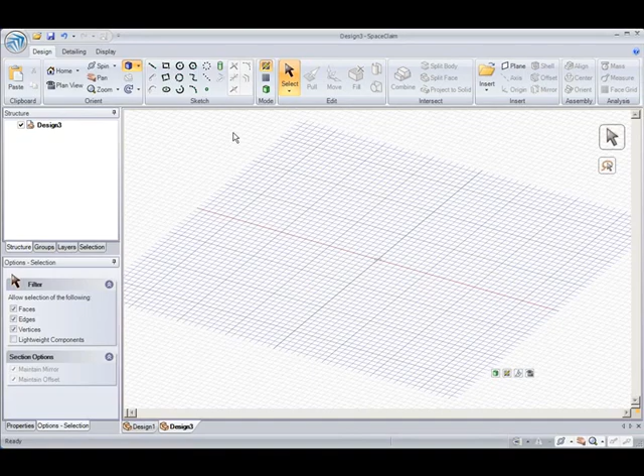First, we'll sketch a rectangle on our sketch grid. I'll start by selecting the rectangle icon. Click once to start the corner of the rectangle, and then you can enter in values. First, type in the width of 4 inches, but don't hit enter yet. Press Tab to switch to the other entry field and enter in the height of 1/2 inch.

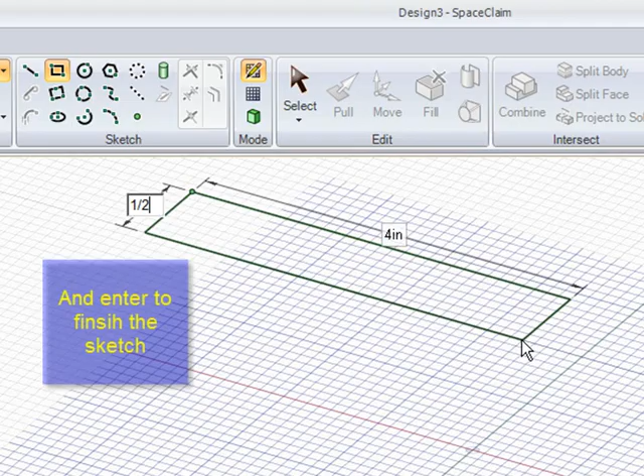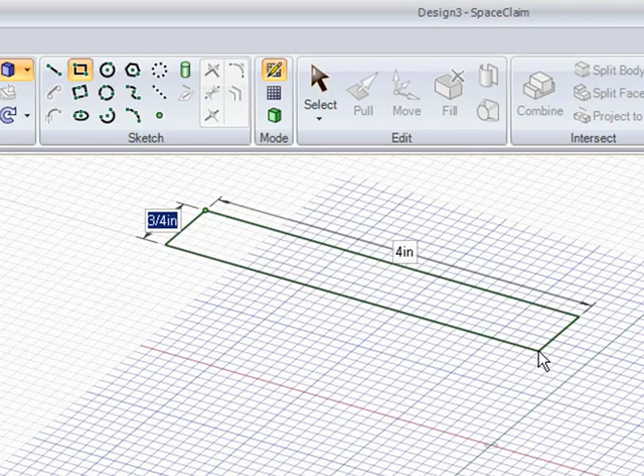If you didn't get the sketch right the first time, just undo using the button in the top left-hand corner of the screen, that's our quick access toolbar. Let's try that again one more time. I'll start by clicking once to start the rectangle, type in the first value of 4 inches, tab to enter the second value of 1/2 inch, and now hit enter to accept both entries.

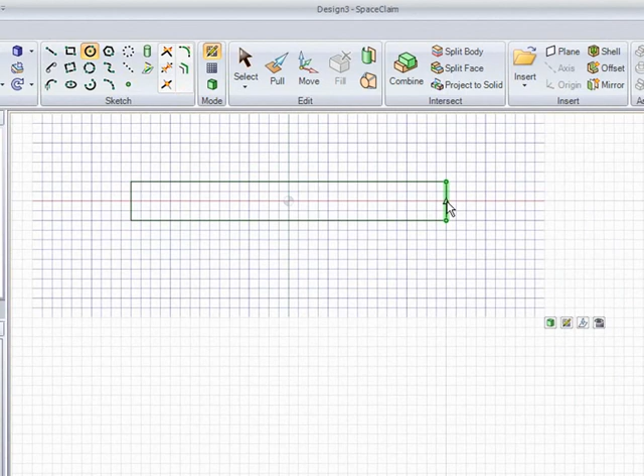Now we will draw some circles, but before we do, let's orient the sketch grid to be heads up by hitting Plan View. This icon is also located in the Sketching mini toolbar on the bottom right-hand side of the screen. To place the first circle, hover over the end line of the rectangle, and while it is highlighted in green, press Shift once to create a dimension off of that line.

This is what we call Shift Touch. Place the center of the circle 1 inch beyond the rectangle, and just go ahead and set its diameter to the same height of that rectangle. We'll do the same thing on the left, but this one will be located farther out. Let's make it 1.5 inches out.

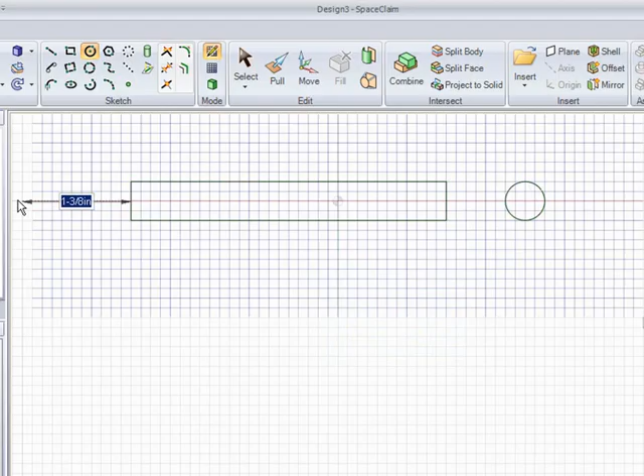Once your sketch is done, enter the Pull tool, and watch how those shapes turn into bounded regions that we can now pull into solids. I'm going to press the trimetric button so we can see everything a little bit better.

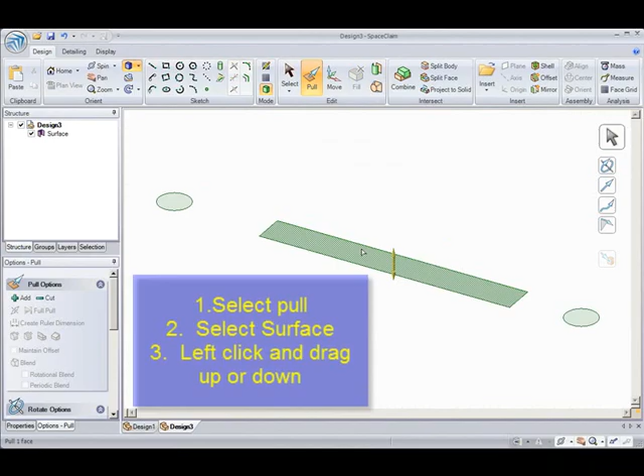First, pull the rectangle up 1/4 inch to make it into a box. Now we'll pull the circle on the right up. Start by selecting the surface and watch as you drag it up to any height you want. But let's say that's not really how high we wanted it, and we wanted to pull it up to the top of our other box.

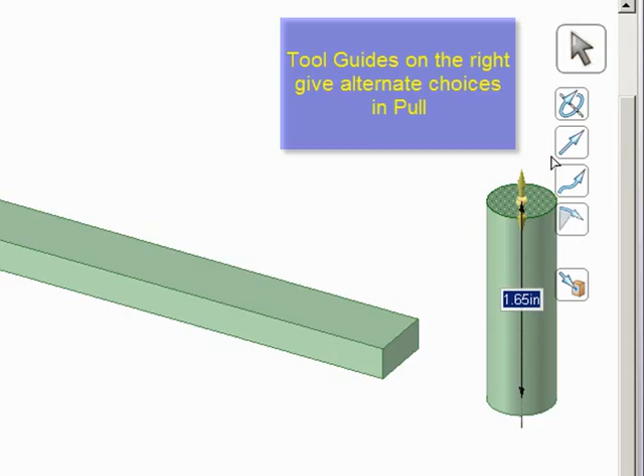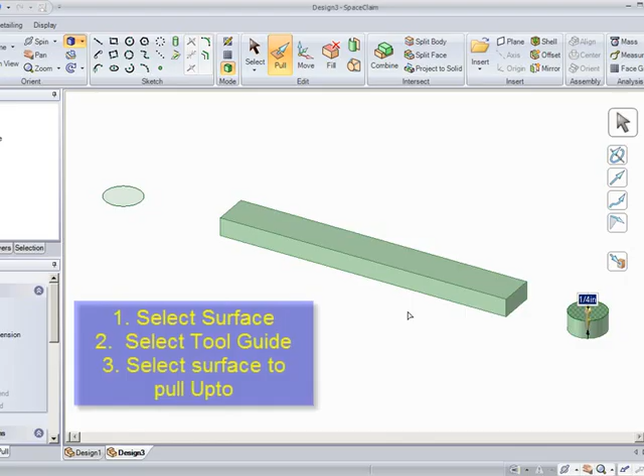For this we can use one of our tool guides on the right side of our screen. These tool guides give you expanded operations within Pull, like revolve, sweep, and draft, which you will learn in later tutorials. The first guide we're going to use today is the Up To Body tool guide. So let's select the Up To tool guide and then choose the top of the box. Notice that the cylinder just jumps right up to the surface you selected. Now we'll do the same thing on the other side by selecting the surface, selecting the Up To tool guide, and then selecting the top of the box.

Now using the same Pull tool, we can change the diameter of the cylinder by selecting on the cylindrical surface and pulling it out to a new radius. Let's go ahead and set that up to 3/4 of an inch.

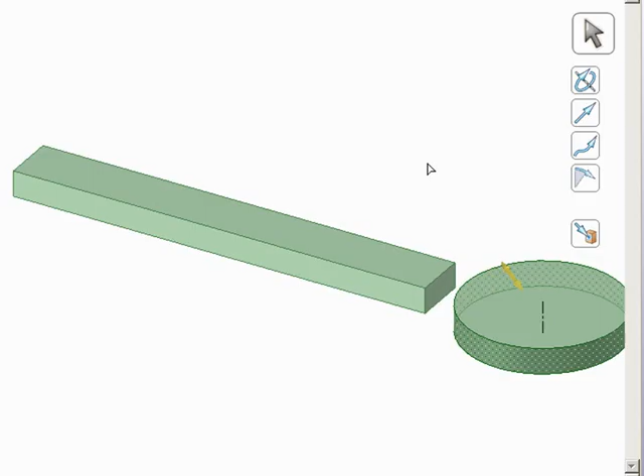Before pulling another surface, make sure that nothing is left selected or highlighted. You can do that by selecting out in white space to clear your selection. Now I'll pull on the wall of the box to make it smaller. Or I can pull the wall of the box all the way into the cylinder to merge those two solids into one.

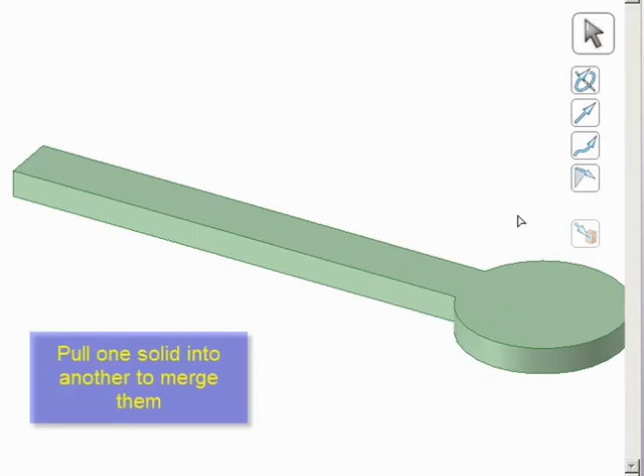Now I want to move the opposite side of the box, so we will need to rotate the model in order to select it. You rotate the model by holding down the middle mouse button while you move the mouse on the screen. Or you could also select the spin icon in the toolbar to do the same thing.

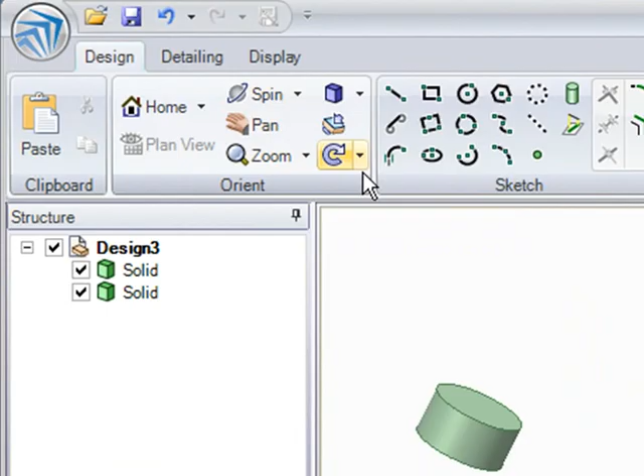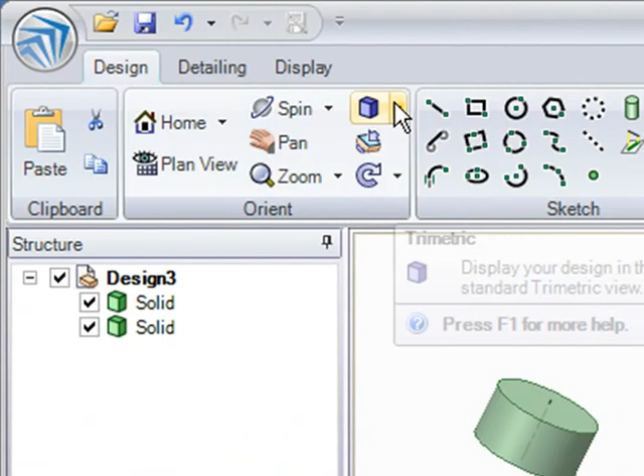While we are learning about navigation, I also want to show you how to pan and zoom. To zoom, press Ctrl and the middle mouse button together while you move the cursor on the screen. And to pan, press Shift and the middle mouse button together and move the cursor on the screen. You could also choose from our preset view settings, which I usually use to get the model back to the view I'm familiar with, the trimetric view.

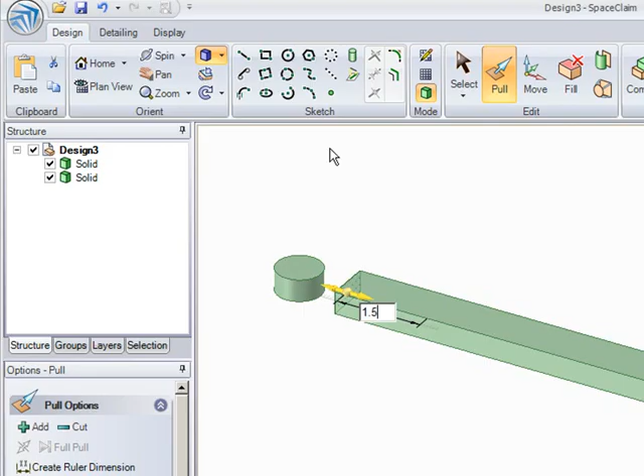Now let's go back to moving that wall. We are still in the Pull tool, but this time we are going to pull to an exact entered value. Select the wall of the box, but this time as you are pulling, hit the space bar. You'll see a highlighted value appear, and now you can enter in the exact distance you want to pull. Let's enter 1.5 inches, which is the exact value we offset the circle originally. And as you can see, those bodies merge together too, and there is only one solid left in the structure tree.

Now let's pull on the smaller cylinder, but this time watch as the walls around it adapt to the changing diameter. I want you to change the diameter of that cylinder to 3/8 of an inch by hitting the spacebar and typing in 0.375.

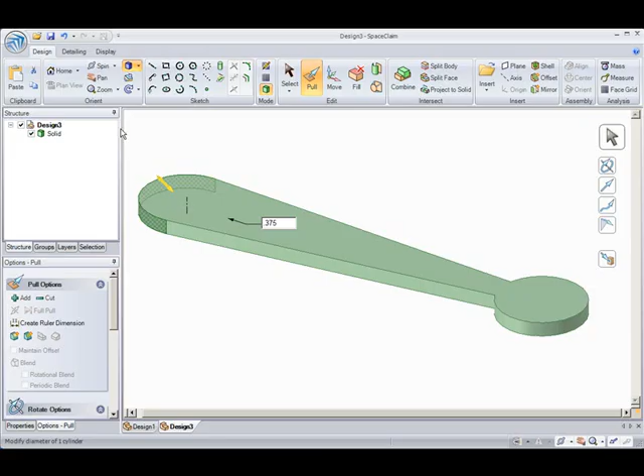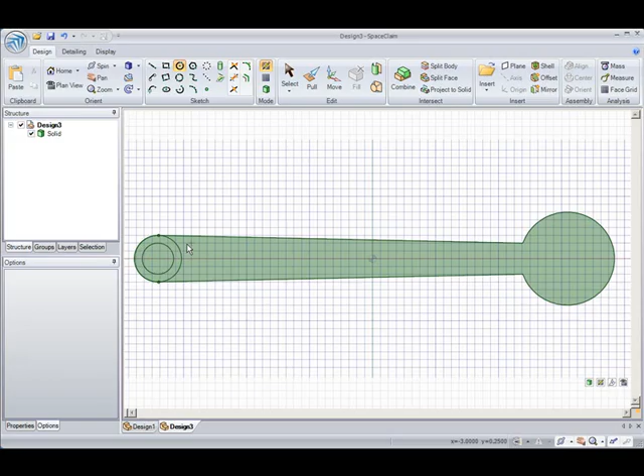Alright, let's sketch some more now. Select the circle icon in Sketch and select the top surface of the component to sketch on. Let's draw 2 concentric circles in here to create the handle. This outer one is going to be the same diameter that already exists. Now using Shift touch off the center of the circles, let's place another smaller circle farther up on the handle. Now we're going to create 2 tangent lines connecting the 2 smallest circles.

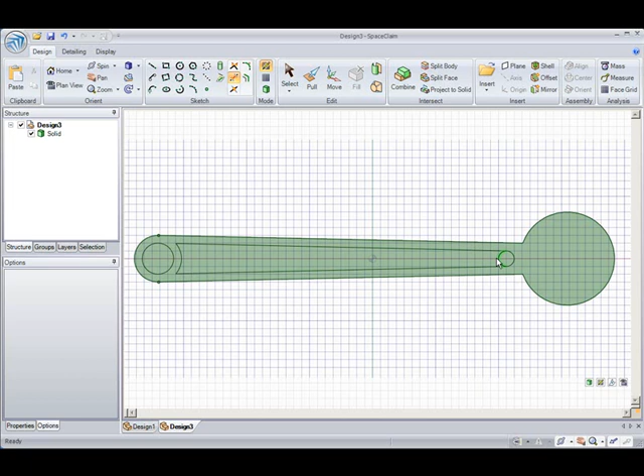My sketch is a bit cluttered, so I'm going to clean up the sketch by extending some of the edges to create corners. Select the Trim tool and select the 2 edges you want to trim together. And we'll see how the sketch trims and connects everything nicely to reflect exactly what I want. Now we'll use the Trim tool, and let's do the same on the other side by clicking on that circle.

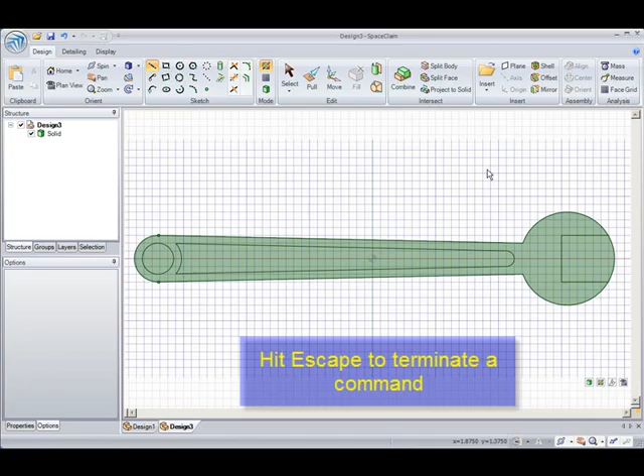Now we're going to draw a chain of lines to create the jaws of the wrench. Start the first line on the edge of the circle, then draw the vertical line down, and finish the sketch by snapping to the circle again. To end a chain of lines, hit Escape, or you could have double-clicked exactly where you wanted it to end.

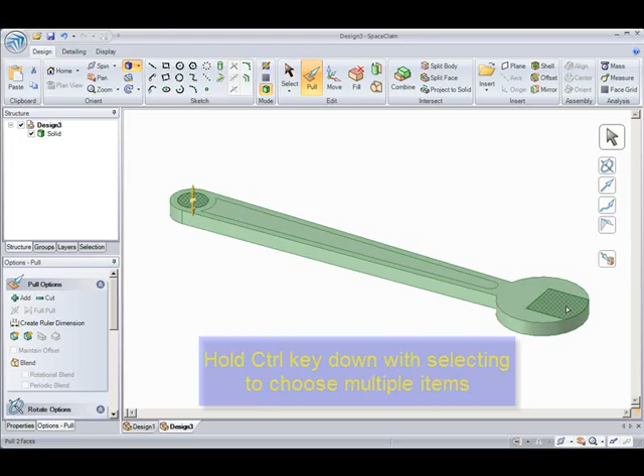Now when I enter Pull, I have 3 more regions to pull on. I'm going to show you how to select 2 regions to pull at the same time. It works just like it does in Windows. Select the circular region first, and hold the Control key down while you select the second region that defines the jaws of the wrench. Now that both of them are selected, you can just pull those together and get rid of the material.

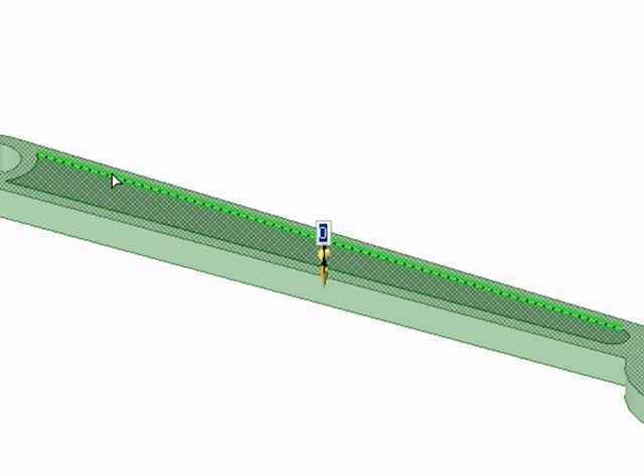Now select the center region. But when the mini toolbar pops up, choose the ruler icon. This allows me to set a dimension. You can see that I am prompted to attach the end of my ruler anywhere I want. Go ahead and attach the end of the ruler to the bottom edge of the component, and then enter in a value of 0.1 and watch what happens. The final thickness of that surface is now exactly what I entered.

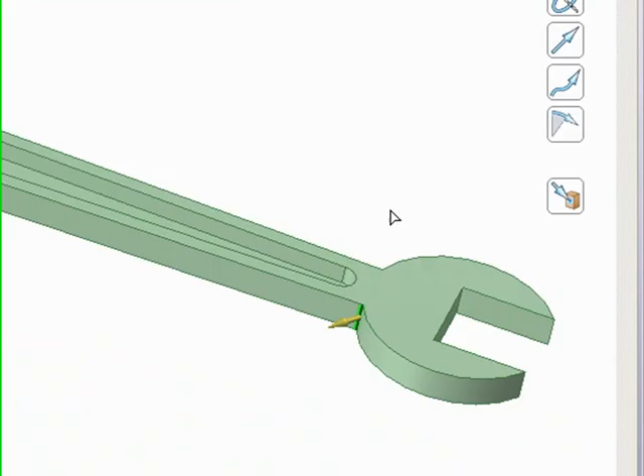We've been pulling on surfaces so far, but let's finish our introduction to Pull by selecting on edges to create fillets. Select the first edge here at this intersection point. Now Control select and also pull on the edge on the other side. And now let's pull them out at the same time.

While you are pulling, hit spacebar to enter in a fillet radius of 1 inch. You could also right mouse button to make that edge into a chamfer instead of a fillet. Or you can even change it back and forth from a fillet to a chamfer after it was already made. Okay, that concludes the basic concepts of pull.

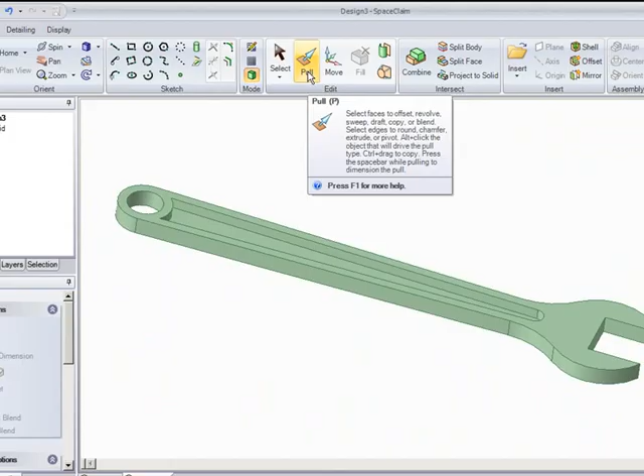If you want to explore more of our capabilities in Pull on your own, or for that matter any of the tools in our ribbon bars, you can hover over the tool to get a tooltip, and then press F1 to expand the help. In the help you will find an AVI that displays how the tool is used, expandable step-by-step instructions, and an introduction to the tool guides found on the right-hand side of the screen that expand the use of the tool.

So to summarize, Pull, as you saw, creates, expands, contracts, and deforms surfaces or edges in a variety of different ways. It lets you create volumes by extruding, revolving, blending, or sweeping profiles. But it also allows you to manipulate edges by filleting and chamfering edges.

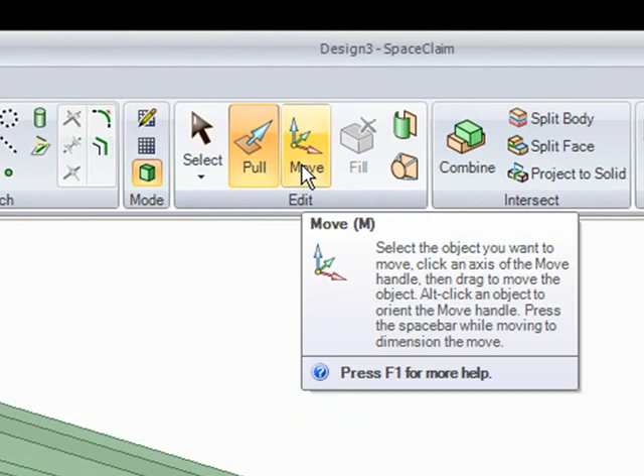Move is different than Pull because it preserves the surfaces and solids as they are and allows you to transform them by translating and rotating the surfaces or solids to new locations. So now that we have sketched and pulled some basic solid geometry, let's move some of the surfaces around.

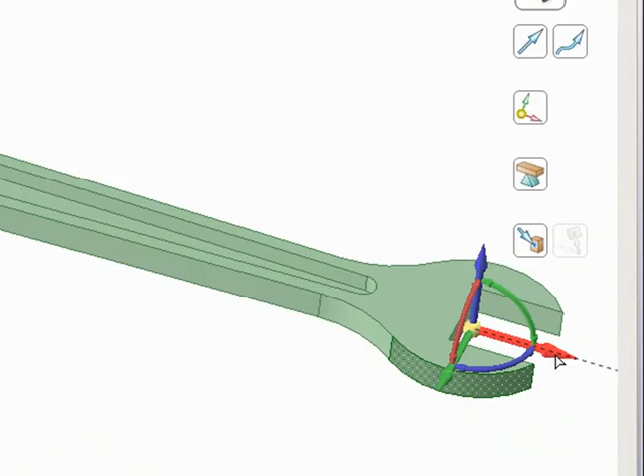I'm going to enter the Move tool, and first I want you to select this outer wall of the wrench. You'll see that a 3D handle pops up, which allows you to manipulate the location of that surface. So let's first select the vector pointed in the direction we want to move. And now I can move that surface back and forth. You can see all of the geometry surrounding that surface adapting as I move it.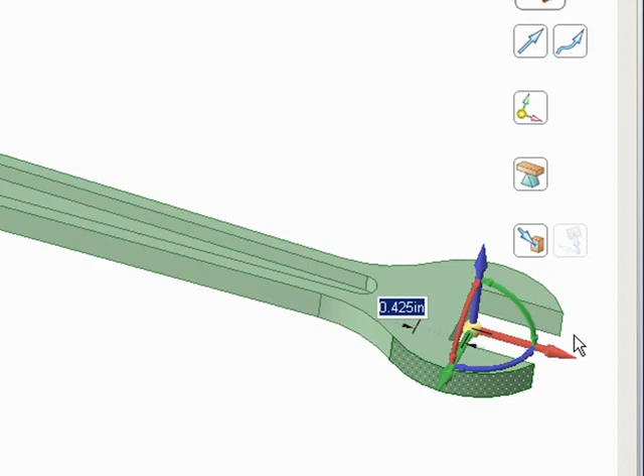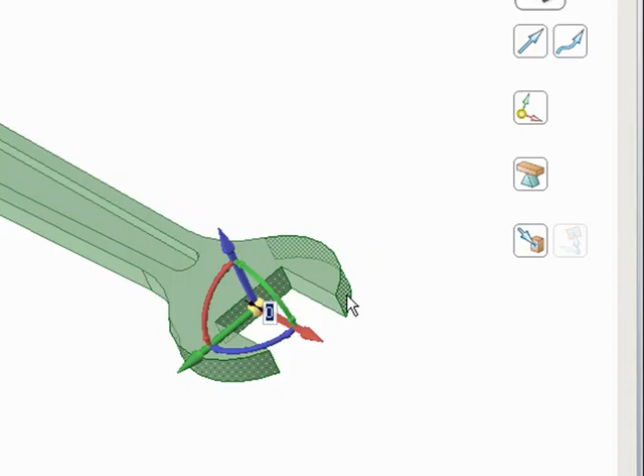Now while you are moving, and your mouse button is depressed, if you want to escape out of this operation, just hit Escape. Now Control Select to also select the middle surface, and let's move both of them together as a group. I will drop the surface right here, but I'm going to undo. But instead of using the button, this time I'm going to use the hotkey Control-Z, just like in Microsoft applications, to undo.

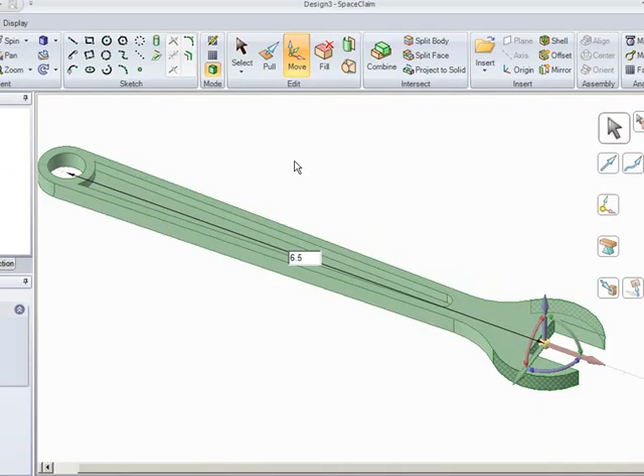Control Select again to select the other cylindrical surface on the opposite side, and I'll move all three together as a group farther out. I can also select the vector in the direction that I want to move and attach a ruler, similar to how I did in Pull. This time attach the ruler to the cylinder at the opposite end of the wrench and enter in a value of 6.5 inches.

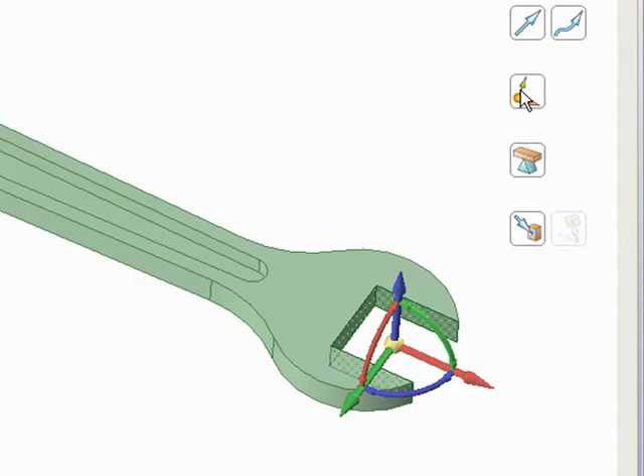Now we are going to rotate some of these surfaces using the Move tool. We'll start by selecting all three interior surfaces that define the jaws of the wrench. Notice that the 3D handle chooses a default location. Let's change that default location by selecting the Re-Anchor tool guide and select this edge as the new location for the handle. Now rotate all three of these surfaces together 10 degrees.

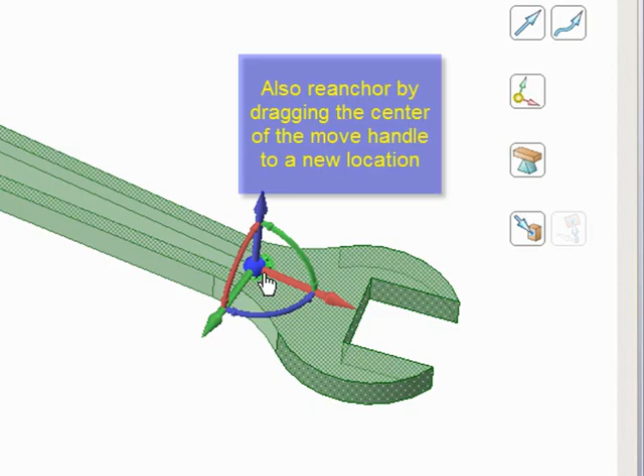Now add the two outer surfaces to the group, and let's re-anchor the Move handle again, but this time we're going to drag on it until we get farther back to this arc. Now rotate all 5 surfaces together 15 degrees. To complete our wrench, let's soften up some of those edges by adding rounds.

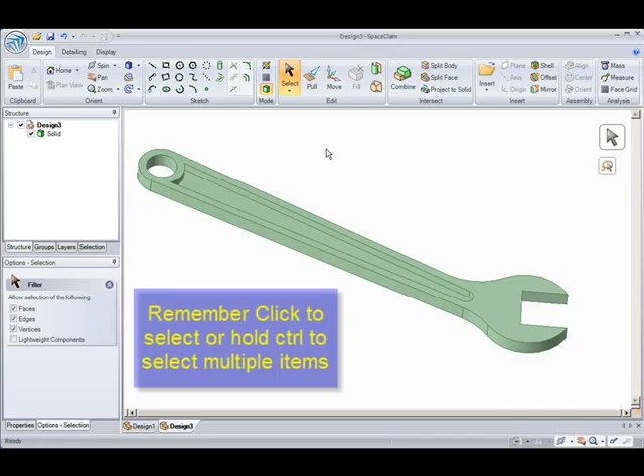I'm going to do this first by just using Select, which is the arrow located up top. You already know that I can select an edge or a surface, and we know about Control Selecting multiple entities. But if you double-click on an edge, you will get a chain. And if you scroll your mouse wheel, you can query select through surfaces, like this.

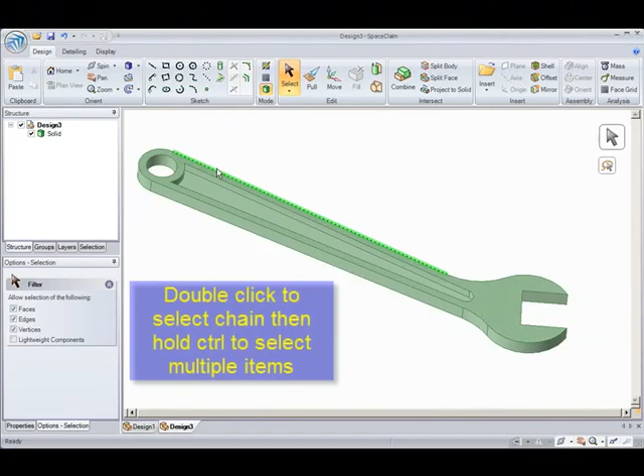With Pull and Move, you can pre-select before you enter the tool, if you prefer a selection action order of operations. So let's do that to create these rounds. Let's double-click on an edge to get the entire chain of edges, and continue selecting more edges by holding the Control key down and selecting more. Now, once all of these edges are selected, pull them in to round the corners.

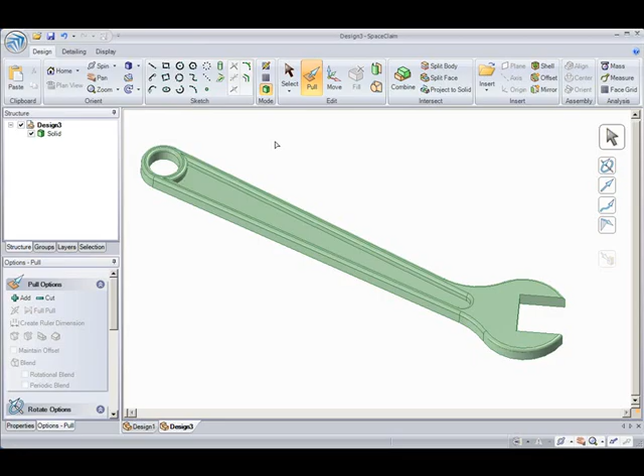Now you have a wrench made from scratch in SpaceClaim, using our basic concepts of sketch, pull, and move. And if you want to save the wrench out, you can do so in the File menu. And after you save, go ahead and open up a new design. I know that you can build a wrench with me, but now it's time to try it on your own.